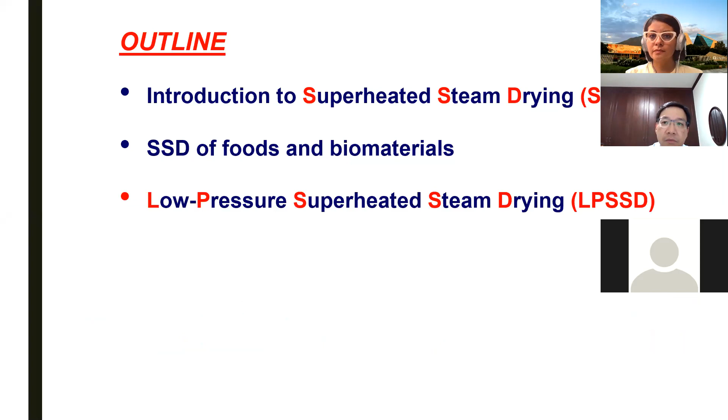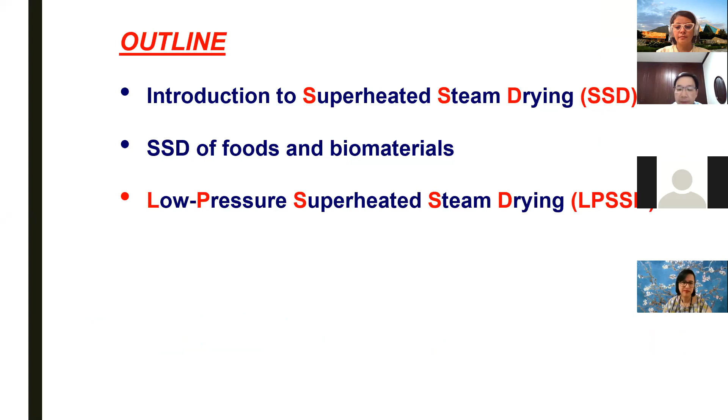So as I mentioned, the title of the talk today is superheated steam drying of foods, and I said some recent advances because I want to emphasize what we have been doing during the past few years, including the scaling up of the so-called low pressure superheated steam drying from lab scale equipment to an industrial scale dryer. First, I'll give some introduction about superheated steam drying for those who may not have heard of it or may not be so familiar with it, just a quick overview of the technology. Then I'll talk about superheated steam drying of foods and biomaterials in general, and focus more on low pressure superheated steam drying, or LPSSD, and show you some examples of what we have done.

As a technology, superheated steam drying is not new at all. It was proposed more than 100 years ago. If you check the literature, you'll see there was a book published in Germany in the 1800s titled Drying Using Hot Air and Superheated Steam. So the technology itself is not new at all. However, it received attention only during the past 30 or 40 years, starting probably at McGill University when people used superheated steam drying to dry pulp and paper. Then people in Europe used superheated steam drying to dry coal, peat, and some biomass. The concept of the technology is very simple.

Instead of using hot air as a drying medium, you just use superheated steam. What is superheated steam? It's steam that has a temperature higher than the saturation temperature of water at a particular pressure. For example, at 1 atmospheric pressure, saturation temperature is 100 degrees Celsius, so if you have steam with temperature higher than that, you have superheated steam. The concept is easy like that.

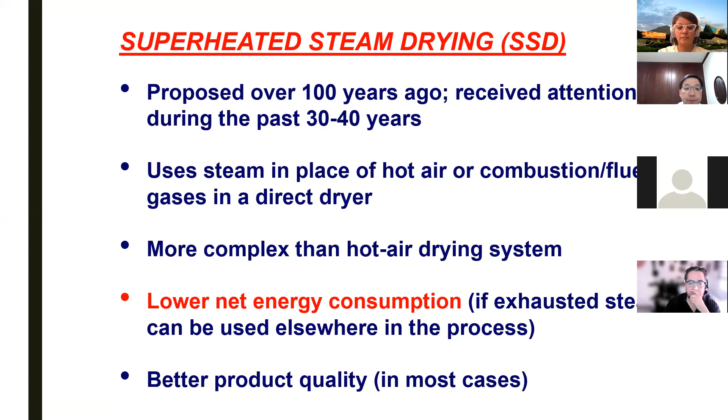Here is a very simple schematic diagram of a superheated steam drying system. Let's say you start from a boiler. A boiler may generate saturated steam at whatever pressure, let's say 8 bar, and then you can reduce it to just a little above atmospheric pressure. You pass this saturated steam to a heater here, and heat it up to make it become superheated steam. Then you introduce this superheated steam into the drying chamber, where you have a drying product.

As I said, superheated steam will transfer heat to the drying product. Water in the product will evaporate, and then superheated steam will pick up the water, cool itself down, and leave the drying chamber as saturated steam. Then you can recycle the steam in a closed loop, and heat it up again to become superheated steam for drying again. If you can do that, the latent heat of vaporization will not be lost - you can always maintain the latent heat of evaporation.

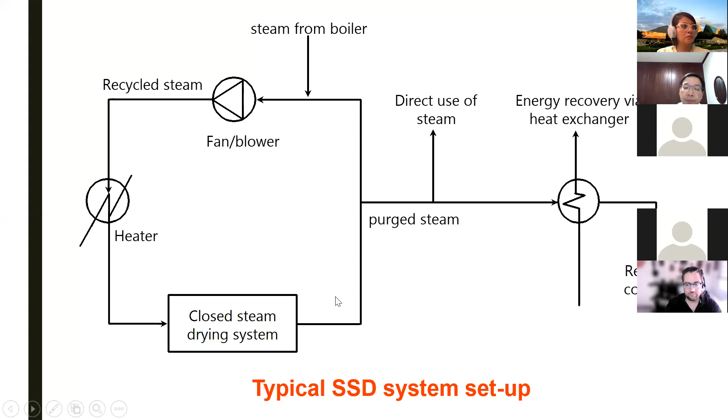The only additional energy you have to put in is at the heater, which is sensible heat. Compare this with hot air, where you cannot easily or economically recover the latent heat of evaporation. Superheated steam drying will consume much less energy if you can recycle the steam like that, because steam is still steam - you generate steam only once and keep recycling it, or if you don't want to do that, you have some other use for the steam.

You can purge the steam out and use it for some other application. In that case, you shouldn't charge the energy consumption of using steam elsewhere to the drying process. Or if you don't want to use the steam directly, you can condense it in a condenser, get the condensate, and use it for other applications like cleaning or blanching. Again, if you do that, you shouldn't charge that energy consumption to the drying process.

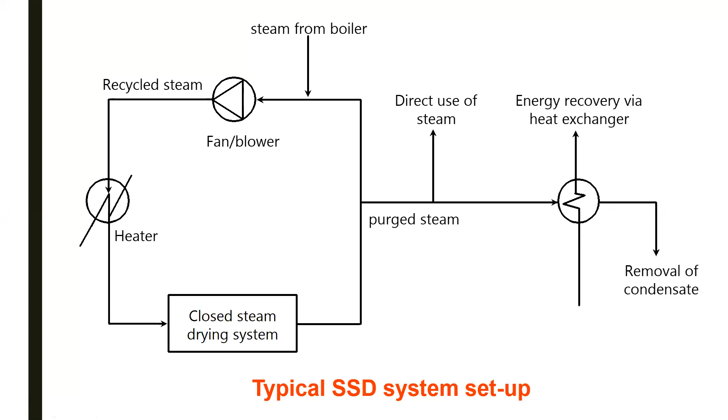This is the reason why superheated steam, when compared with hot air drying, will have lower net energy consumption. I say net energy consumption, okay?

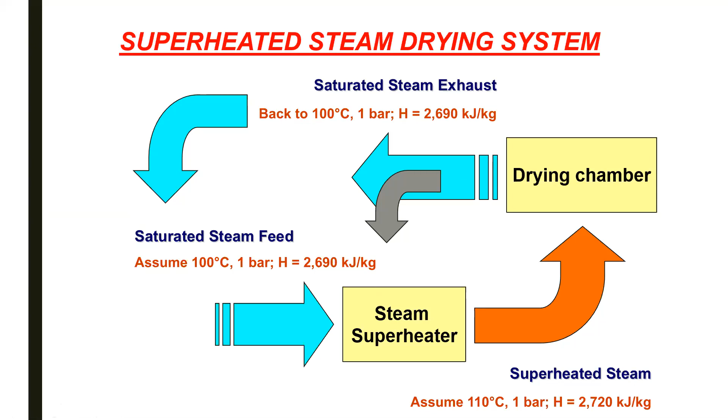Take a look at this diagram. If you start with saturated steam feed at 100 degrees Celsius, 1 bar pressure, the enthalpy is about 2690 kilojoule per kilogram. You pass this steam to a heater, gas or electric, and heat it up to 110 degrees Celsius at the same pressure. Enthalpy increases to 2720 kilojoule per kilogram. You use this superheated steam to dry your product in the drying chamber, and at the outlet you get saturated steam again, back to 100 degrees Celsius, with enthalpy back to 2690. So if you want to heat it up again, you only need to add 30 kilojoule per kilogram of steam. You can see that you save a lot of energy. This is one benefit of using superheated steam drying.

During superheated steam drying, two important phenomena take place. The first is initial steam condensation. Imagine the drying product sitting in the dryer at room temperature, or a little higher, say 30-35 degrees Celsius, and then you introduce superheated steam at 100-something degrees Celsius into the drying chamber. Of course, you have condensation of steam on the surface of the cooler drying product, and that steam condensation leads to some increase in the moisture content.

You might say, I'm doing drying here, why should moisture content increase? Well, in some cases it's a good thing - I'll talk about it later. Along with the slight increase in moisture content, you'll also have a very rapid increase in the surface temperature of the drying product, because the steam, upon condensation, releases latent heat to the product, so its temperature goes up very quickly. Again, there's some benefit to that rapid temperature increase.

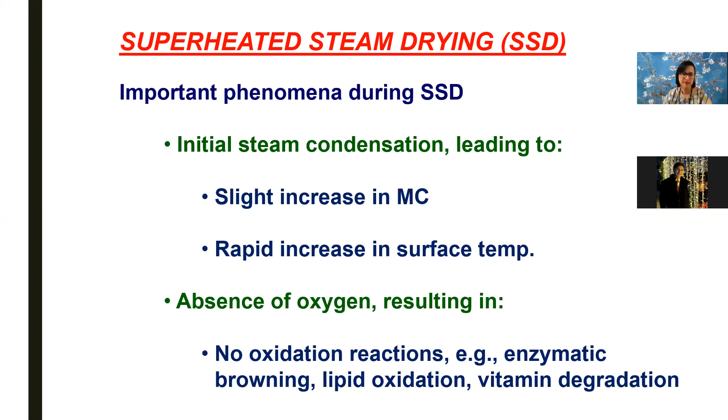The second phenomenon is that you'll have a negligible amount of oxygen in the drying chamber, because when you blow the superheated steam in, it purges out all the air and fills the chamber, so there's more or less no remaining free oxygen. You may have some 2-3%, quite low compared to 21% in hot air drying. With no oxygen, you have negligible oxidation reactions like enzymatic browning, lipid oxidation, or vitamin degradation. So product quality in many cases is better than hot air dried product.

Starch normally gelatinizes at a temperature of around 60-70 degrees Celsius. In hot air drying, even with high drying air temperature, the temperature rises slowly, not as quickly as with superheated steam. So when you still have water for gelatinization to take place, you don't have enough temperature - it's not high enough for gelatinization. But once you've reached the temperature where gelatinization can take place, you don't have enough water left for gelatinization to fully take place anymore.

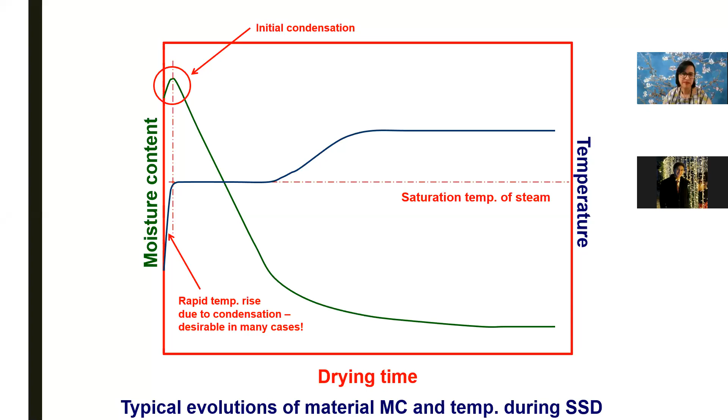When the water evaporates or vaporizes, its volume will increase like 1,000 times. What happens is that the matrix or structure will be pushed and then expanded quite a lot. So at the end, you have a lot of pores or empty spaces inside your product, and this porosity will increase and affect the texture in a desirable fashion. Your product will become more crunchy. And if you try to rehydrate that product, rehydration will be much better than hot air dried product, because you have a lot of pores and empty spaces.

That is because of the rapid temperature increase along with the availability of water during the initial period of drying, which is not possible in the case of hot air drying. In hot air drying, in the beginning you have a lot of water, but temperature is still low, so water would not vaporize. But by the time the temperature of the product is high enough for water to vaporize, you don't have water left to vaporize anyway. So that's a limitation of hot air drying.

The temperature will remain at the saturation temperature until you reach the critical moisture content and enter the so-called falling rate period. Temperature will stay at the saturation temperature of steam during the whole constant drying rate period. In hot air drying, this temperature is the wet bulb temperature, but in superheated steam drying, it will be the saturation temperature of steam. Once you enter the falling rate period, the temperature will start to rise and eventually approach the superheated steam drying temperature. That is what happens during the superheated steam drying process.

As I said, superheated steam drying would yield higher product porosity due to the evolution of steam within the product, which in turn results in lower bulk density, aiding rehydration and making rehydration behavior more superior. We also found that case hardened skin, which is likely to form during hot air drying, is less common in superheated steam drying, probably because steam tries to move from inside to outside and leaves the structure, and the skin, more porous.

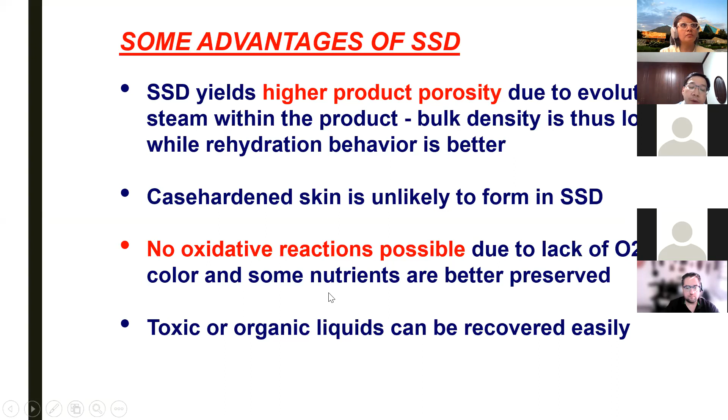Because of the lack of oxygen, no oxidative reaction is possible, so color and many types of nutrients are better preserved. And if you remove toxic or organic liquids instead of water, those liquids can be more easily recovered because they are non-polar compounds, while steam is a polar compound. So you just need a simple decanter to separate the organic liquid from the condensate.

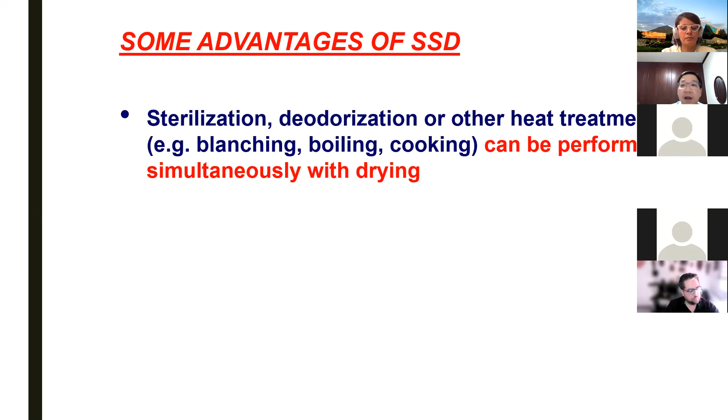Another interesting thing is that you can perform other heat treatments like blanching, boiling, cooking, or even sterilization, deodorization, and microbial inactivation simultaneously with drying, because you are drying at a relatively higher temperature. You can do parboiling of rice at the same time as drying, for example. In our lab, we proved that we could prepare parboiled rice in a matter of minutes, compared with the traditional process which requires hours to prepare parboiled rice.

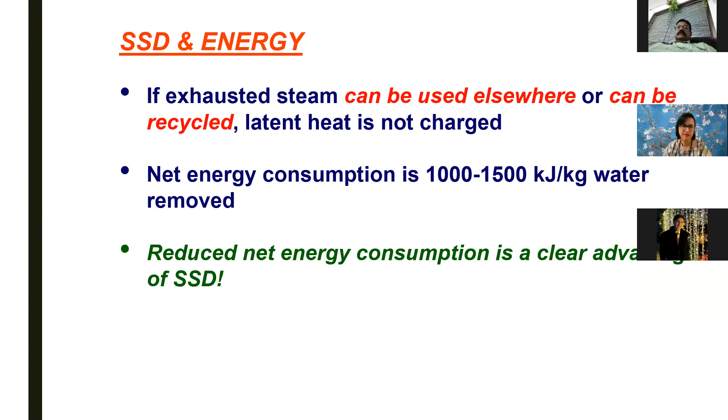In terms of energy, as I mentioned, if we can recycle the exhaust steam or use it elsewhere in the plant, the latent heat should not be charged or counted as the energy consumption of the drying process. That would lead to a net energy consumption of superheated steam drying of only 1,500 kilojoules per kilogram of water removed, which is 3-4 times lower than hot air drying. Don't forget that hot air drying is about 2,500 kilojoules per kilogram.

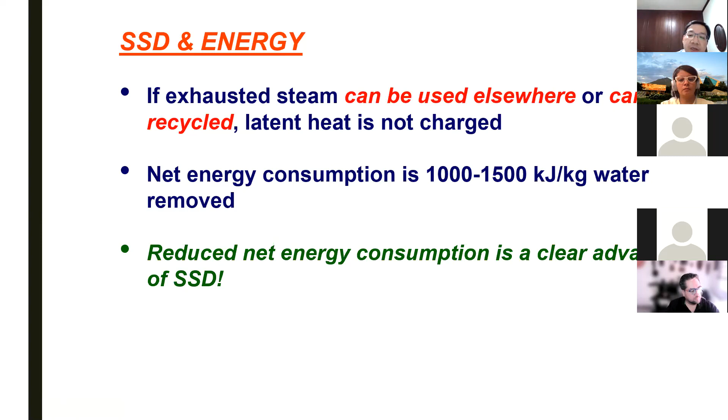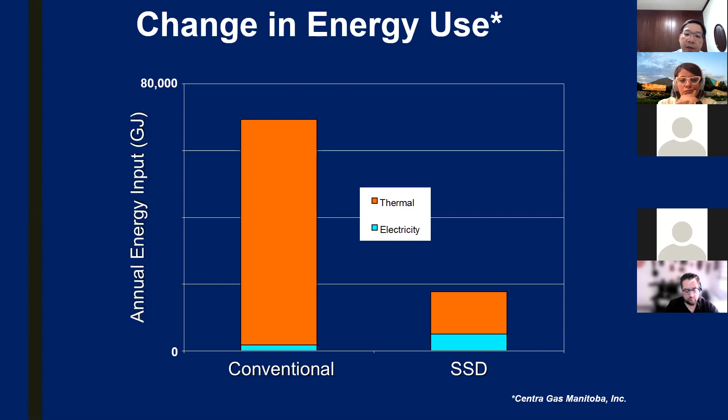That's the latent heat of vaporization of water, but in the real drying process, the energy consumption is more than that. So reduced net energy consumption is one clear advantage of superheated steam drying. This data is from a company in Canada, and you can see that conventional hot air drying requires much more thermal energy than superheated steam. You may require a little more electricity for superheated steam, because you may need a larger blower, but in terms of thermal energy and overall energy requirement, superheated steam is much lower.

Every process has pros and cons. What about the disadvantages of superheated steam drying? As I said, the system is more complicated than hot air drying. Another important disadvantage is that products that may melt, undergo glass transition, or be damaged at the saturation temperature of steam cannot be dried using a typical superheated steam dryer. We have a solution for this, which I'll mention toward the end of the presentation. But if you stick to conventional atmospheric pressure superheated steam drying, this is the limitation.

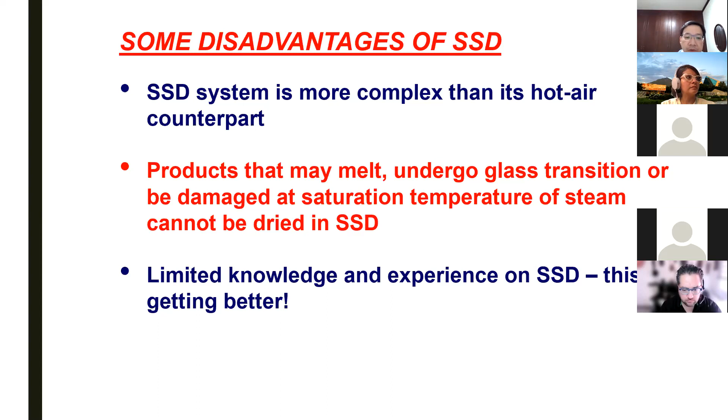Another important limitation is that limited knowledge and experience on superheated steam drying is available, because although the technology was proposed a long time ago, not many people have adopted it, especially at industrial scale. So there's some limitation, but this is getting better because more people are working in this area. There are companies that provide superheated steam dryers now, both in Asia and Europe, and we hope the situation will improve in the near future.

In principle, you can transform any convective dryer into a superheated steam dryer. Any dryer that introduces hot air directly into the drying chamber, in direct contact with the drying materials, is called a convective dryer. You can convert it into superheated steam, at least in principle.

You may see fluidized bed superheated steam dryers in Europe, rotary superheated steam dryers in Australia and New Zealand, flash dryers or pneumatic dryers operated using superheated steam as the drying medium, and conveyor dryers, which are available commercially from a company in Japan. There's even superheated steam spray dryers, something many people are working on right now—groups in New Zealand, Germany, Japan, and our own group are working on superheated steam spray drying at the moment. So the possibilities are there.

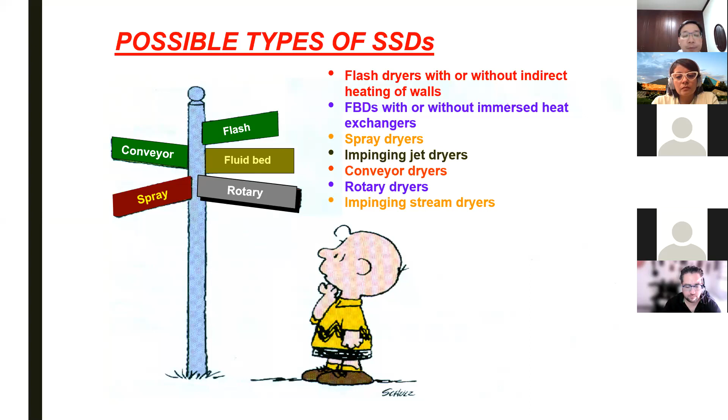In terms of food products, superheated steam has only been applied to food about 20 years ago, because superheated steam drying of food gives several advantages. For example, there's a lack of oxidative reaction, so you have the ability to maintain color and nutrients, and you get a product of higher porosity, as I mentioned. You also have the ability to inactivate microorganisms much more effectively than with hot air drying, and you can conduct many heat treatments at the same time as drying—boiling, parboiling, or blanching simultaneously. So instead of having two units in series, you can combine a blanching unit and a drying unit into just one unit if you use superheated steam as the drying medium.

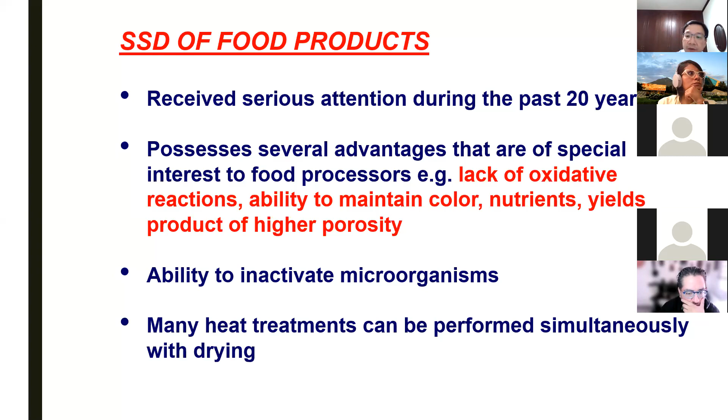I'll give you an example. This result is quite old, almost 20 years ago, but it still gives a good idea of what superheated steam drying can do. A group of people in Japan dried potato slices in this dryer, and they had a very nice setup where you can operate superheated steam drying and hot air drying in the same setup, so they can compare the two drying processes fairly.

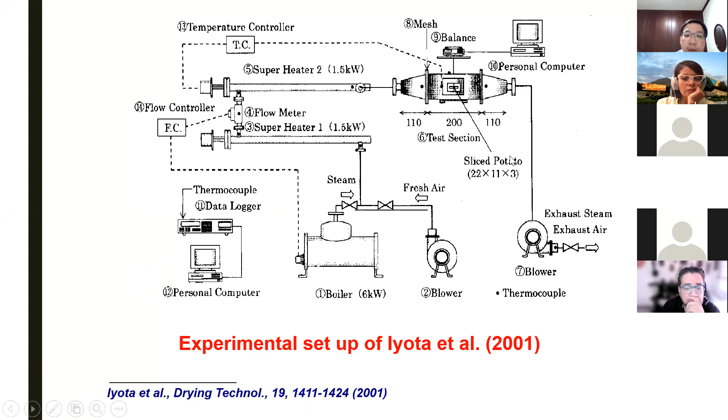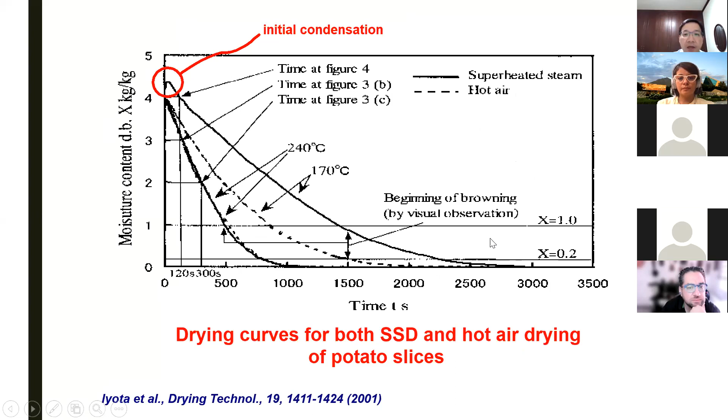You can see the drying curve here. In the case of hot air drying, the curve just starts and goes down—a nice exponential curve, as we're familiar with. But in the case of superheated steam, you have some increase in moisture content at the beginning, as I mentioned, and then the curve goes down as usual. What's more interesting is that the microstructure of superheated steam dried and hot air dried products are quite different. Let's say at 170 degrees Celsius here and 170 degrees Celsius here—same temperature.

In the case of superheated steam, you don't see any starch granule anymore, but in the case of hot air drying, you still see a lot of starch granules. This is because with superheated steam, you have initial condensation, a lot of water, and the temperature is there, so you can have a much more complete gelatinization of starch. With hot air drying, you cannot have complete gelatinization, so you still see a lot of starch granules.

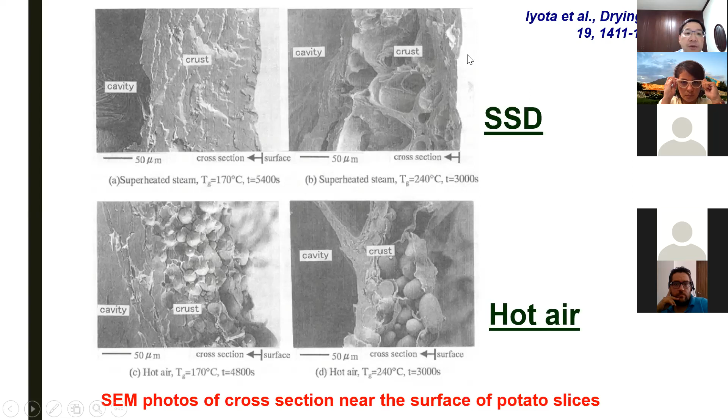In terms of porosity, if you look at the right picture here, in the case of superheated steam drying, you see a lot of pores, a lot of opening. In the case of hot air, you see a thick crust here, a very thick crust. Just imagine if you have to bite through this hot air dried potato slice—it will be very hard to bite through.

Or if you want to rehydrate this for some reason, the water cannot go into the pore easily. So the rehydration behavior or capability of this hot air dried potato slice would be much more inferior than the superheated steam dried potato slice. This is the advantage of superheated steam drying.

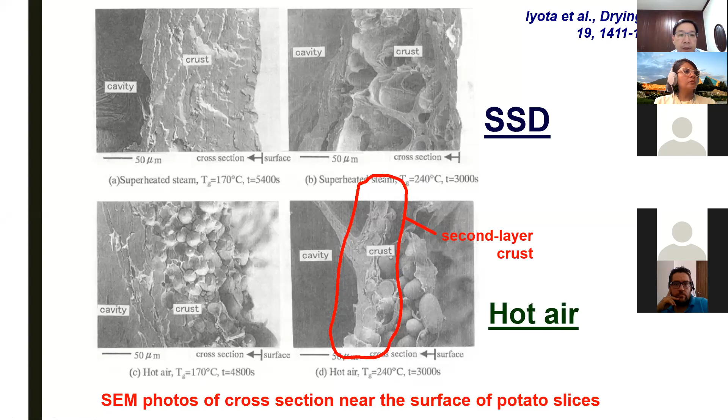And you can apply this to all kinds of snacks, actually. Fruit snacks don't have to be only starch-based products, but can be many types of fruits. People try so many things—people try using superheated steam to dry potato chips, tortilla chips.

But one big problem is that there's no oil on the surface, so it's quite difficult to apply other ingredients like salt or some seasoning. So some companies have to spray oil on the surface of the steam dried potato chips, and at the end, they feel it's not worthwhile. So they go back to frying because they have to put the additional oil on anyway. Although the texture of potato is good, very similar to fried potato, you cannot apply seasoning or salt, and people won't like it, unfortunately.

In our lab, we try superheated steam drying with shrimp. It's very interesting because if you want to produce dry shrimp, normally you have to boil shrimp in salt solution first, and then dry it. But if you use superheated steam drying, you can just dip or soak shrimp in salt solution, and then put it in the dryer directly, and get dry shrimp in one step.

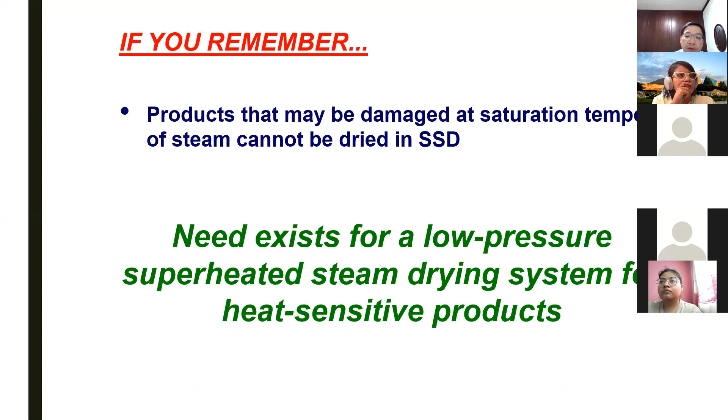And in our lab, we try superheated steam to dry vegetables, fruits, and herbs, but we found some problem here because fruits and vegetables, and especially spices and herbs, are normally damaged at the saturation temperature of steam at atmospheric pressure. So we cannot use conventional atmospheric pressure superheated steam to dry this product. So a need exists for a low pressure system for heat sensitive products.

So we did that. We combine approaches because we want superheated steam—we want all the advantages of superheated steam, like no oxygen, ability to produce high porosity product, the lack of oxygen. We want it, but we do not want superheated steam at higher temperature. So we go back to the definition of superheated steam. What is the definition? It's steam at a temperature higher than saturation temperature. But it doesn't say anywhere that saturation temperature has to be 100 degrees Celsius.

If we reduce pressure, it's simple physics—water boils at lower temperature, meaning saturation temperature is lower. Then we get saturated steam and superheated steam, of course, at lower temperature. So we use this idea to come up with the so-called low pressure superheated steam drying, or LPSSD, which is a simple combination of vacuum drying and superheated steam drying. We operate the dryer at reduced pressure, get saturated steam at lower temperature, and can use the system for all kinds of heat sensitive products like herbs, spices, fruits, vegetables, and other biomaterials like biopolymers, chitosan, gelatin, and similar materials.

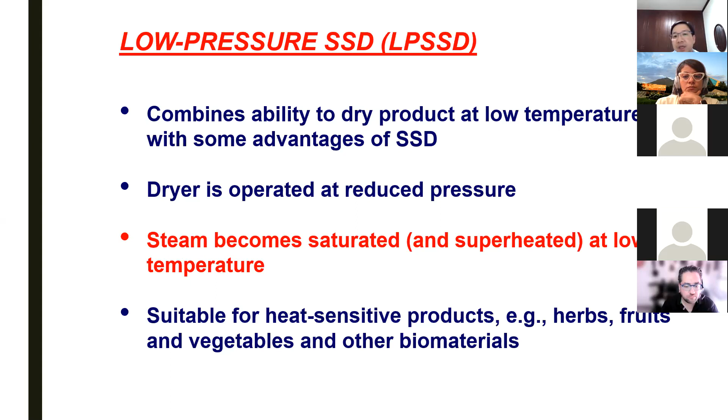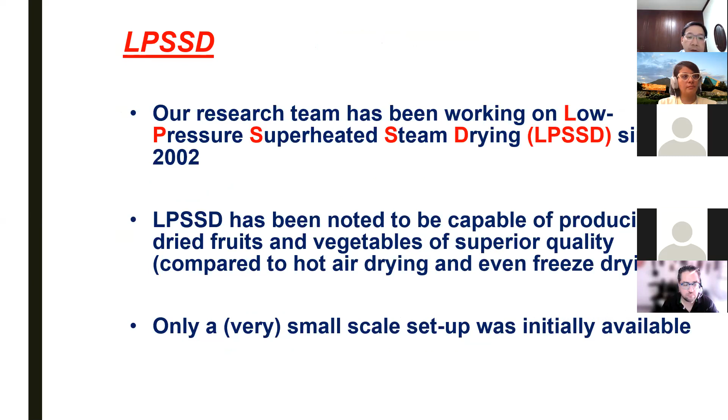Our lab started working on LPSSD about 20 years ago, and we've tested this drying system with all kinds of products. We're quite happy with that, and some of the products are of higher quality than even a freeze-dried product. But the problem is we have a very small setup in our lab.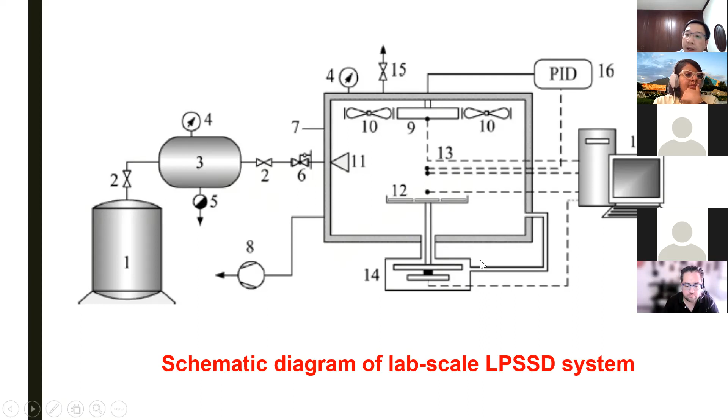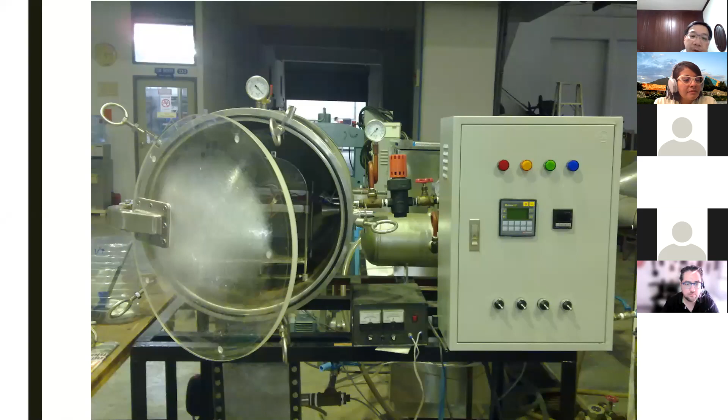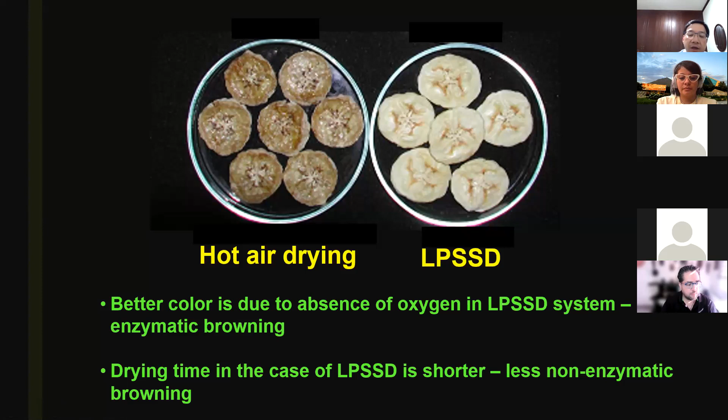So a company was interested in the technology, but they wanted something bigger than what we have in the lab. The company, called Natural Produces, is a small company in Thailand - a brand new company that started about 3-4 years ago. They expressed interest in commercializing LPSSD for the production of dry fruits and vegetables. They wanted us to help with the design, fabrication, and testing of the dryer. It was very challenging work actually, because no field experience on this technology was available.

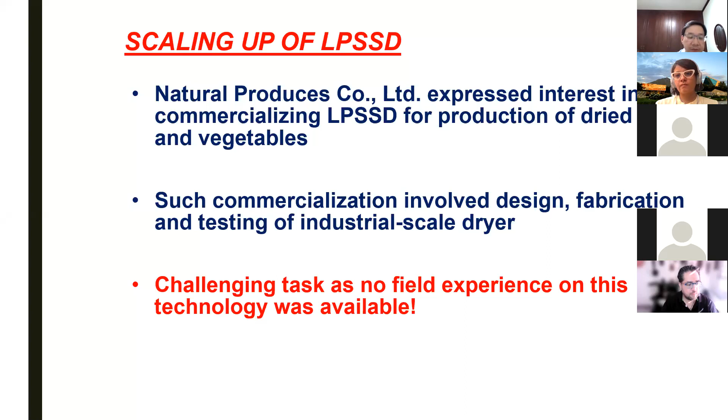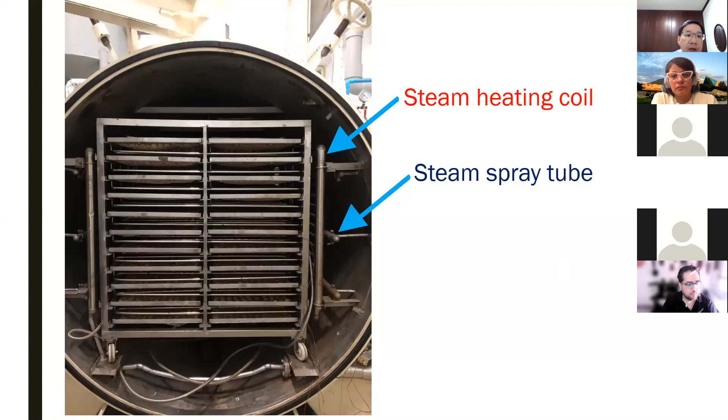But if you open the door, this is what you will see. We can put the cart here, and the cart will carry a lot of trays where you put the material to dry, and you have a steam spray tube here. You spray saturated steam into the drying chamber, and in order to maintain the steam temperature at whatever value we want, we have a steam heating coil. In our lab at school we use an electric coil, but at industrial scale we use steam at a higher pressure running inside the coil to maintain the temperature. Then, of course, we connect this drying chamber to a vacuum pump.

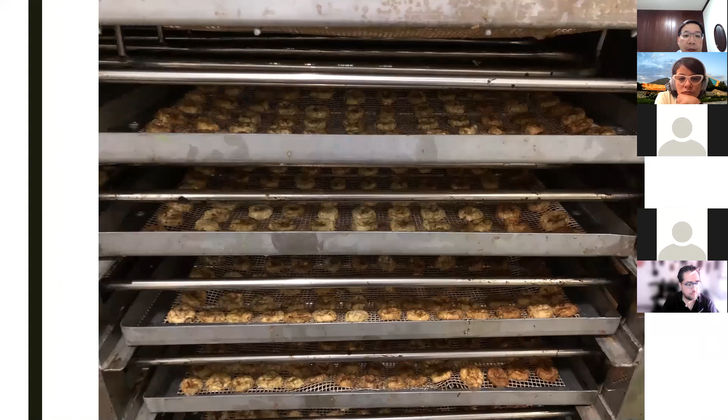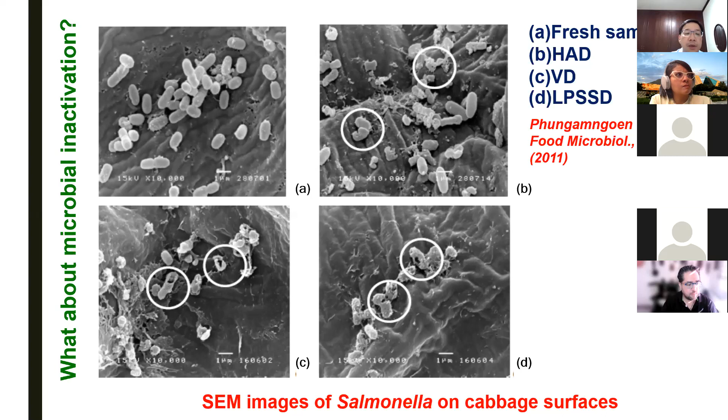So I guess in the end, I will not say much. I'll just say that there is still much room to play with this technology. We have been using this technology to produce fruit snacks, plant-based meat ingredients, food powder. There are of course many other things that I couldn't think of yet, but you may be able to come up with some new idea of your own. So you're welcome, and it would be nice if you can come up with some good idea.

Then you share your idea with me, either through submission of manuscript to Drying Technology, and we look forward to reading your work on that. Thank you.